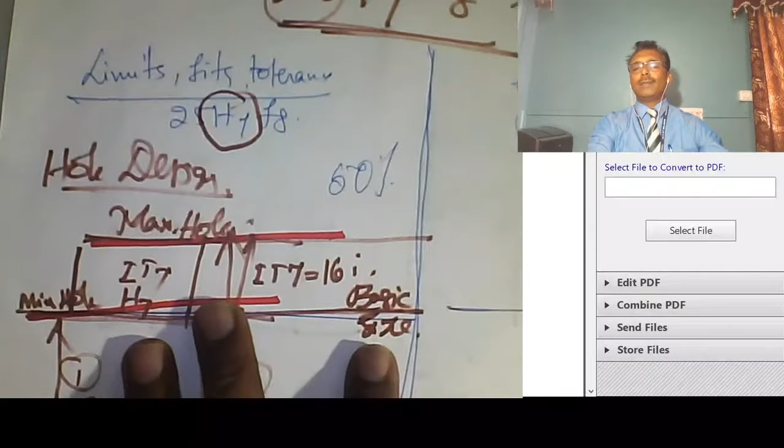Okay, just a minute, I have one more camera, I just showcase that. Can you see this? Yeah, look at this. So effortlessly they are moving from one slide, then see, on the background they have a PPT. I doubt, I was always doubting how these people are doing all these lectures.

There are two ways of live streaming the lectures, please know this, there are two ways. One is direct live streaming on YouTube, wherein the flexibility is very limited, okay, you can see my video or the presenter's video on full screen. It is quite useful for theoretical subjects where it is only one-way delivery.

You don't need a PowerPoint presentation, it is only the discussion, but at any given point of time, if you want to write something, you will get stuck in that.

Otherwise, you will have to go in the layman's way, write something on a sheet and hold it before a camera. It looks thoroughly unprofessional. So I was wondering how these online classes are being conducted. What is the way to do this?

For the next 7-8 days I worked on that, and this is now the final situation. I think you can see now, while giving lectures, I can start working on this. I will discuss all these things whenever I want. I can come back to the drawing sheet, then if I want, I can go back to my PDF file.

Yeah, can you see this? Then I can showcase, can you see? Yeah, now look at this. So all this is possible.

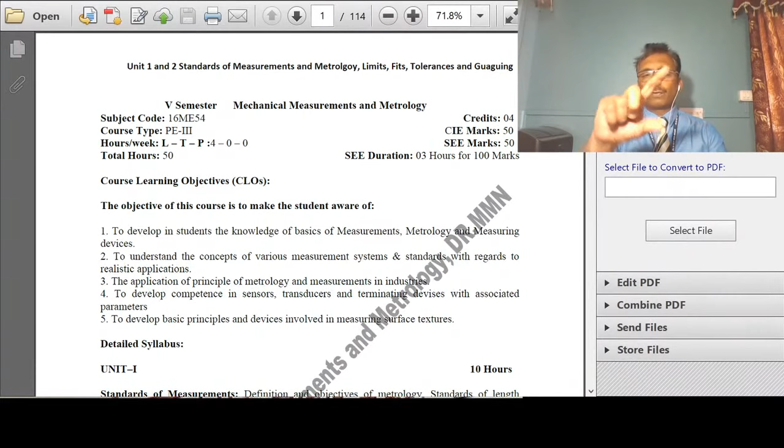Looks good, all set. I can see 15 students. Arey wow, that looks good. Who are the newcomers here? Epic, boring, no not you. Wait 2 minutes, we'll call our friends. Oh that looks great, great. Epic.

I will wait for your feedback. I will wait for some more time. Wait for another 5 minutes. Not a problem, as long as I can reach out to many students, I will be more than happy.

Gaurav, Omkar Gaurav, good morning. Then who are the other students? Please introduce. 18, arey wah, number is going up. 4 likes, good.

Meanwhile, for the next 5 minutes, I will tell you my arrangements, what I have set up, a studio here in my home itself. Can you see? I will showcase you this. I don't want to disturb the camera setup, but nevertheless, I will show you through my laptop.

There is, I have made, one is a table lamp right in front. Then I have 2 screens, but the second screen I am keeping it idle. Like in my room, I use double screens, right? So I have one more screen here, I am not using it. Then I can show you this. Can you see this setup here, please? Can you see this? Yeah.

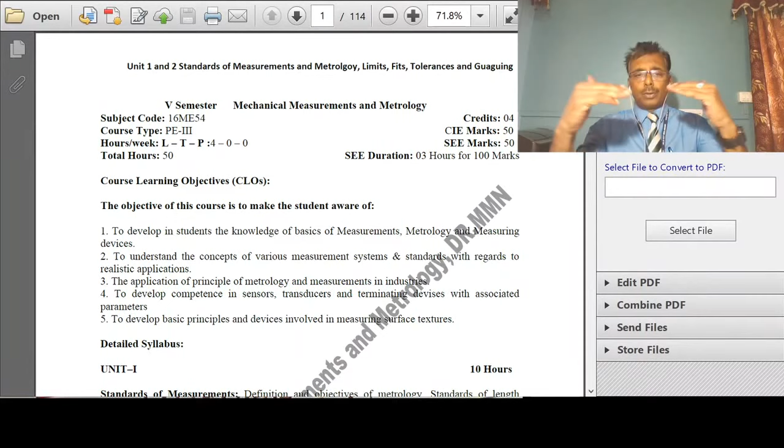Like you can showcase what you want - it is so flexible. You can go to YouTube, you can run YouTube. You want to go to Firefox, you can project that Firefox onto your screen. That can be shown straight away without any lag or disturbance, as if you are in front of your computer.

No, I want to write something and give the lectures - that can be done. Just a minute, look at this. Yeah, I want to write something now, I want to showcase as if I'm in a classroom. That can be done, can you see this?

Then, no, I want to go back to my PDF file. Good, so I can refer to the PDF file. Then I want to change - the same sheet is being seen, right? Let me change, can you see this?

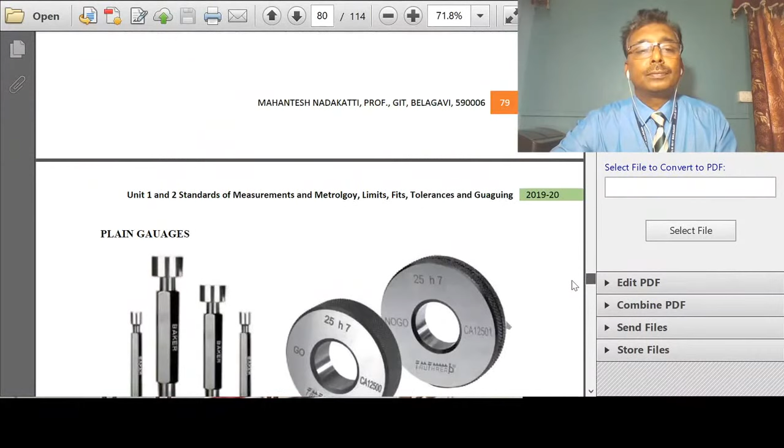Okay, we are discussing the problem on gauges. Let me go to the gauge section here, can you see this? All this flexibility is available. Now look at this, plain gauges - we are going to discuss about gauges now.

Okay, let me just check how many are online so that I'll start my regular class. The time is now 10:12, and 16 students have joined us.

That looks interesting, then who is this? JM, good morning. Aniket Rao, good morning. Kiran Hiremat, oh I see, so you are the epic footballer, is it? Great to know about it. Next, I don't know who is this creepy freak - has not introduced the epic creepy name please. Who is this name, epic footballer? I don't know, did I miss out? 16 students, 6 likes, thank you.

Okay, so that's about my arrangements and my way of doing things. Hope we will have a good session. Can we start now? If someone can ping me 'start sir', I'll go ahead, or you want me to wait for some more minutes?

Who is this? Wait for, yeah, who is this? Somebody told wait sir, we'll call - yeah, footballer epic. Chetan Kumar Hubballi, good morning. Yesterday also you were present, great to know, so you are back. Back to live streaming. Then epic footballer, wait 2 minutes, we'll call our friends. Epic, who are you? I don't know the name. Anyway, did you call your friends or pass on your WhatsApp groups? Ask them to join me, I'll be more than happy.

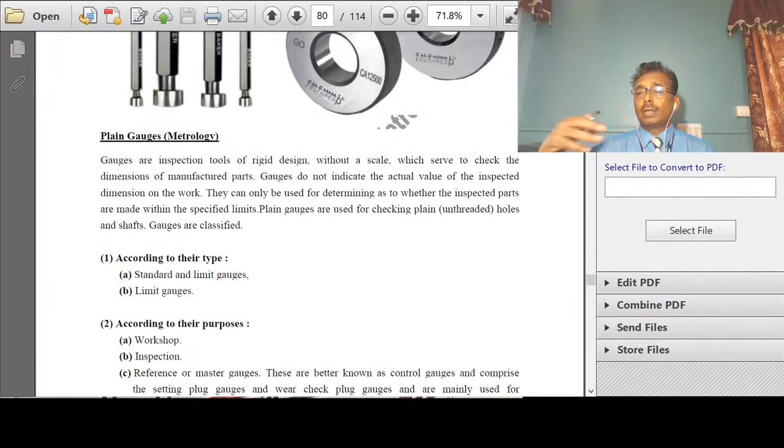So maybe tomorrow is a Sunday, Monday I'll take up the last unit. Maybe I can also discuss unit number 3 - I'll just revise what I have covered in class. I will revise all topics connected with unit 3 on basic mechanical measurement systems, standardized measurement systems, and some definitions associated with measurements. Then I can discuss intermediate modifying devices - primary, secondary, intermediate modifying devices, and the final readout devices. Then I can go ahead with pressure gauges and the various ways of that. Anyway, I will discuss that part during my next session.

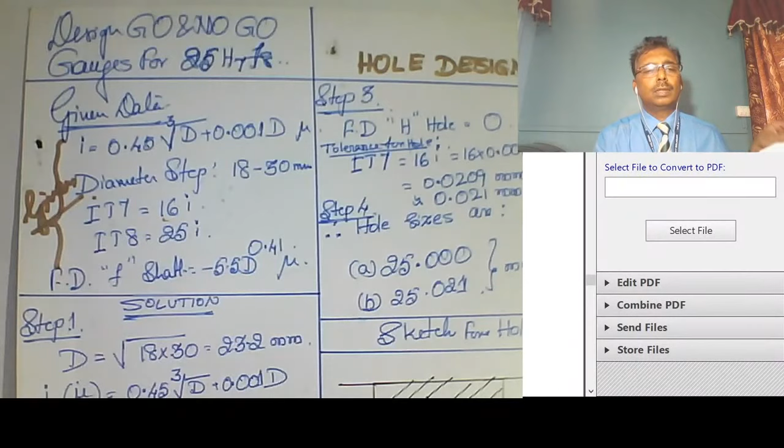Design of go and no-go gauge for 25H7F8. That's my today's topic. Yesterday also I started with the same, right?

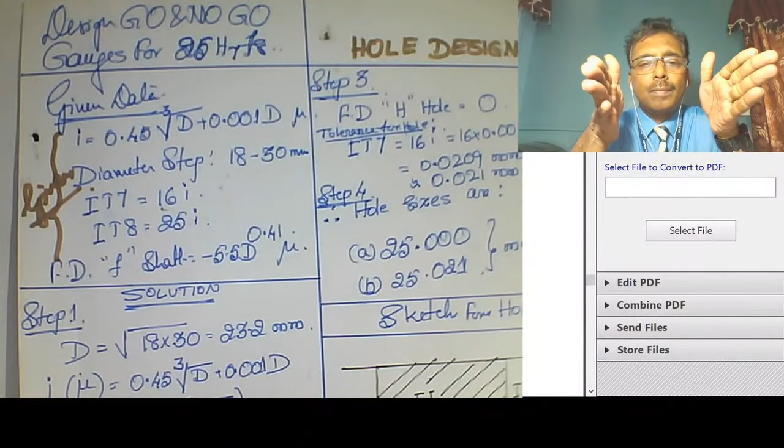Continuing with gauge design problem. 25H7F8, let us break this problem into two parts: one is limits, fits and tolerances problem, and another is gauge design problem. Now with examination point of view, what are the things that are needed?

Read the problem carefully. Problem may say - I think I have uploaded some numericals with you, you can go through the question papers and previous question papers. Go on my Google homepage, you will see previous question papers. I'll tell you how the question paper, or the pattern of question paper, looks.

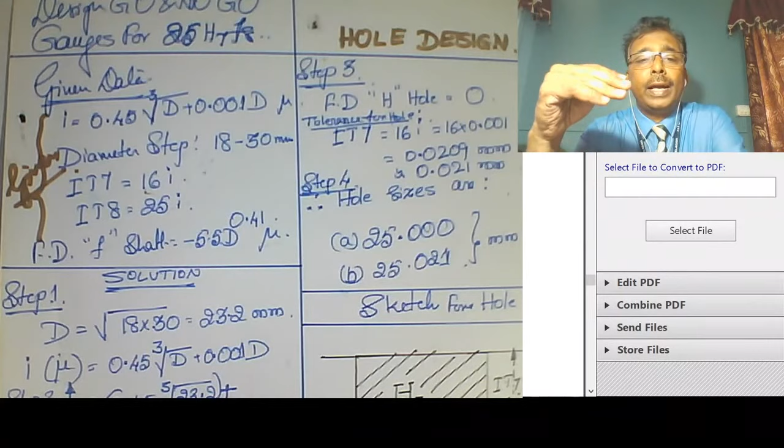Design limits and fit. Design a hole and a shaft. The tolerances for hole and shaft for say 25, 30, 35, 32, 33, that is the size, basic size. H, A, B, C, D, E, F, G, H, maybe H or maybe G hole, G5 or H7 - in this case is H7, and shaft, small letter shaft, F8, F4, A, B, C, D, E, F, G, H.

Okay, this is our XY line. Always I'll hold it this way, this is a scale. Right from A to H hole, they lie above the XY line.

This difference we call as fundamental deviation. Let me write it for you with a sketch pen so that it becomes easier. Can you see this please? Okay done, I will quickly review the nomenclature. This looks okay, done. Let me change the laptop position.

This looks horizontal. Okay, now this is how we have to exercise. This is hole A, say this is D, this is H hole, this is say K hole, this is P hole, then this is Z hole. Can you see this? Z hole.

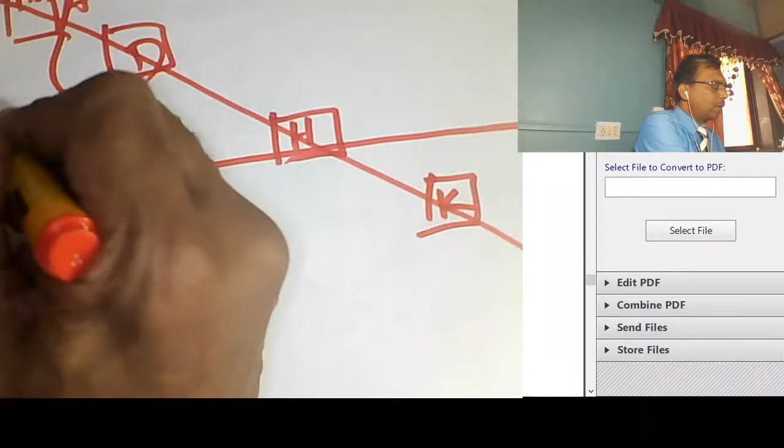This is called as fundamental deviation. And for A to H holes, fundamental deviation is positive. FD is positive.

Next, say something beyond H, J to Z - fundamental deviation, and don't refer to J, K, L, M, N - I can certainly say K to Z is negative deviation. This is fundamental deviation, FD. Okay, exactly opposite is shaft case.

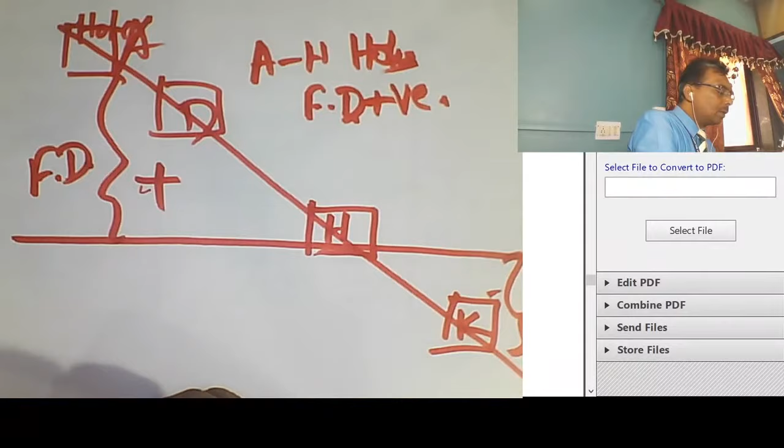I think now it's clear. Okay, shaft nomenclature. See, this is A shaft, this is D shaft, this is H shaft.

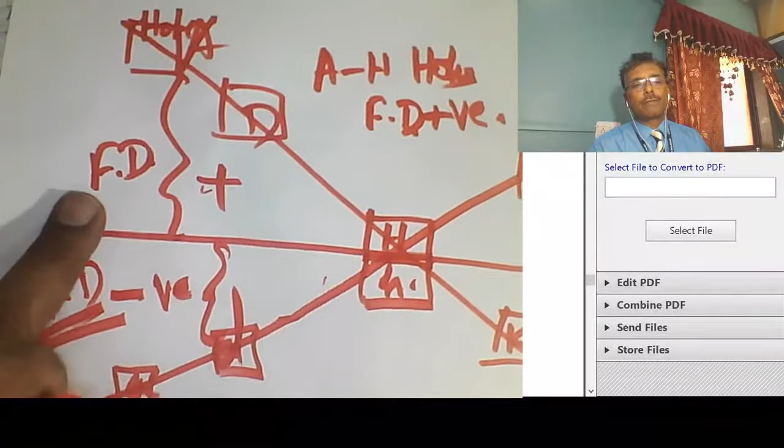H shaft. This is negative fundamental deviation, FD is negative. And similarly, K shaft, small p shaft, small zf shaft, and this fundamental deviation here is positive. Clear? This is positive, this is negative, A to H, A to H, small.

But I'll separately draw for H, just have a look. H hole and H shaft. Their fundamental deviation is 0. Can you see this? They lie exactly on a basic line. This is our basic size.

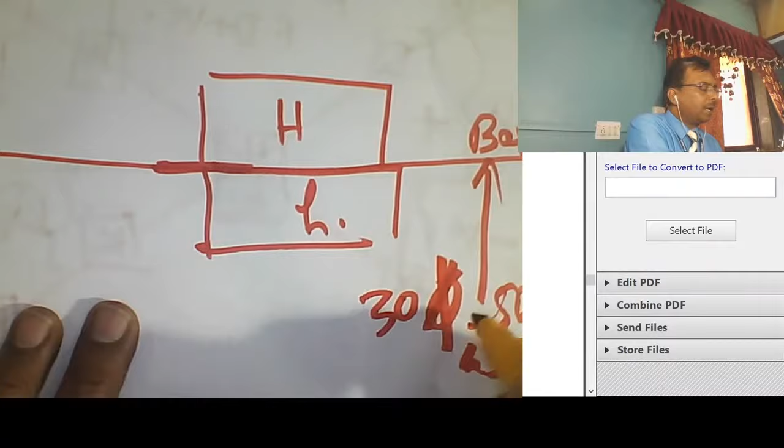Basic size could be 50 mm phi, 45, whatever. What is given? Say 30, in present case 25 diameter. This is in mm. The present example is 25 mm, which means that this size is 25 mm.

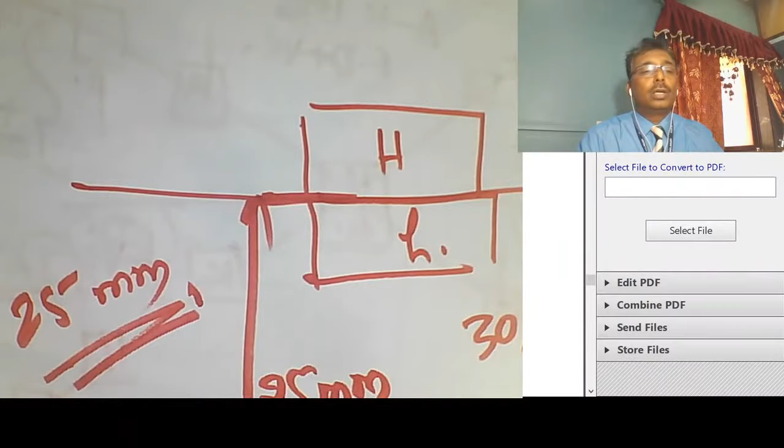I'll continue. So now coming back to the numerical, 25 mm. As I said, H hole, H shaft. For H hole and H shaft, the fundamental deviation, that is the distance between this basic line and the minimum tolerance. So we need to understand the minimum and the maximum tolerances.

If this is the hole, say this is 25 D hole, let's say D4, which means that this basic size is 25. This difference is fundamental deviation. It corresponds to hole D. You will have some equation, minus, it is plus, this side is, can you see this plus? It is above the XY line. So you will get, I'll show you the equations, fundamental deviation equations.

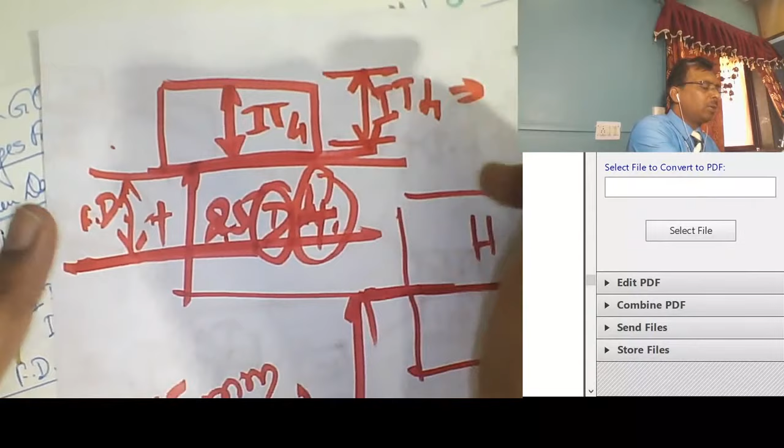Next, this corresponds to the IT grade. How much? In this case, it is 4. So IT4. How much is IT4? We have to find out. That will be given normally as 6i, 8i, 10i. I don't know how much is this, but I have to just check. That is given to you. You don't have to remember. Okay, this is the background of limits, fits, and tolerances.

So come back. Okay, 25 H7 F8. So the basic size is 25 mm. H hole with IT grade as 7, F shaft. The numerical in the examination will be given with this data.

i is equal to 0.45 cube root of D plus 0.001 D, and it is in microns. Mu is microns. Okay, next, it is better that you remember this, it's a fundamental equation that anybody can remember. Don't expect this, if in the examination it's not given, you may not say that sir, the data is insufficient or the equation is not given. Don't say that. i is equal to 0.45 cube root of, can you see this?

I is equal to 0.45 cube root of D plus 0.001 D, in microns, wherein the diameter D is given in terms of mm. This D is called the nominal diameter, which is nothing but the diametral step, the standard diametral step.

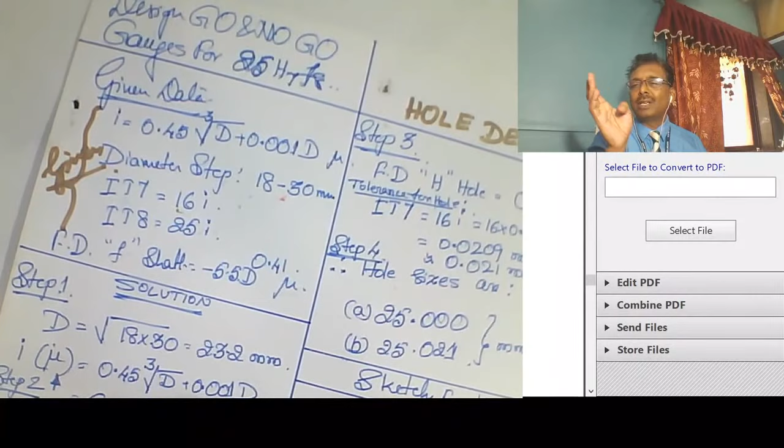These diametral steps are also given but not necessary; the examiner may or may not give them. You have to remember the basic diameter steps: 1 to 3, 3 to 6, 6 to 10, 10 to 18, 18 to 30, 30 to 50, 50 to 80, 80 to 120, 120 to 180, and so on. But if you remember up to 120 it's more than sufficient, since all or most applications are well within that range. So you are expected to know this.

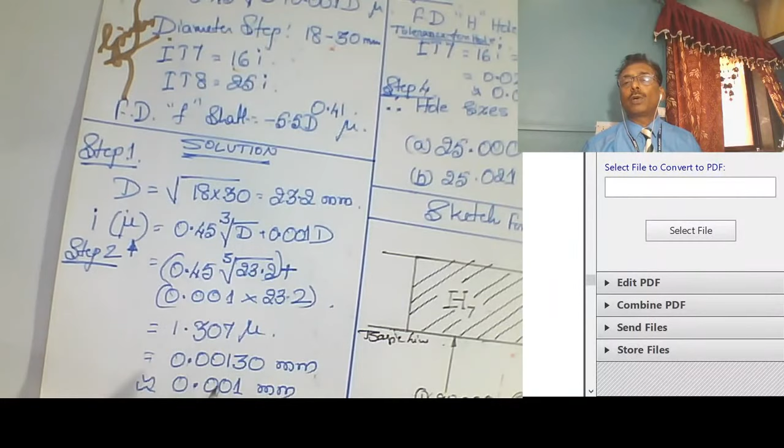Yesterday I solved the problem right up till hole design and shaft design. Quick review: D value is root of D1 into D2, substitute D in terms of mm, that is 18 into 30. Next, the I value: I is equal to 0.45 cube root of D plus 0.001 D, where D is substituted in millimeters. What you get here is in microns, 1.307 microns, that is nothing but 0.001 mm.

This was discussed yesterday. Now, step number 3, hole design. Simple, draw the sketch, H7, write it down. This is the basic size. We need to find out two values of the hole.

This is the one size, this is the second size. I have mentioned 1 and 2. First size is 25 mm, anyway it is given to you, and the fundamental deviation for the H hole is 0. IT7, yes, it is given as 16i by the examiner, so you don't have to remember it.

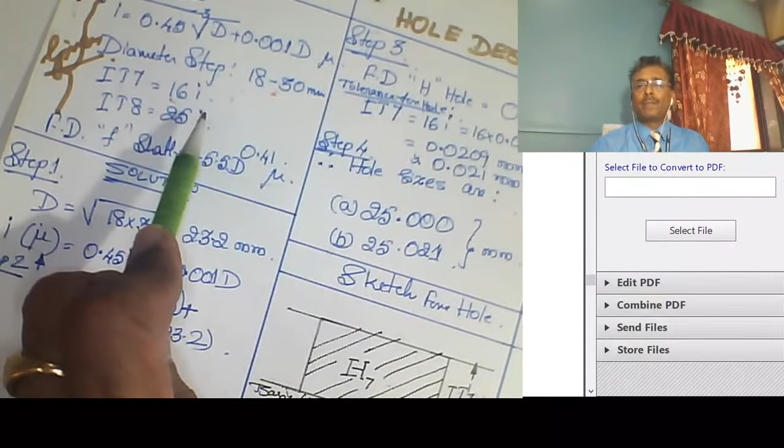IT7 is equal to 16i. 16i is nothing but what we found for I. IT7 is 16 into 0.001 mm, so you get 0.0209 mm.

Next, the two values of the hole: just mention 25. IT7 is equal to 16i, that is 0.021 mm, which means the second value is 25.021. So this is the minimum size of the hole, this is the maximum size of the hole, and both are positive values.

Next, shaft design. First, draw the shaft. F shaft lies below the XY line, right? I did discuss this earlier, you can easily remember this, keep it in mind.

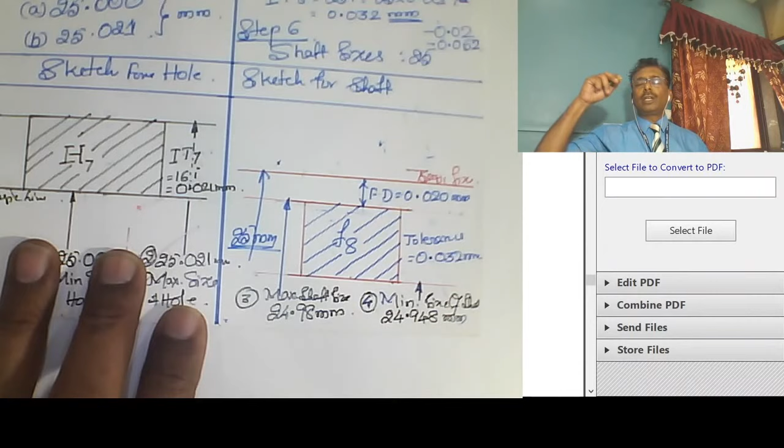Keep this in mind. Now it shows the F shaft. F shaft stands for fundamental deviation as minus, it is on the negative side. I have mentioned fundamental deviation as 0.020 mm. It is just below the basic size.

Now we need to find out the IT grade. IT grade for F8 is IT8. And what is the fundamental deviation? How much? For F shaft, FD is given as minus 5.5 d to the power 0.41, minus 5.5 into 23.2 raised to 0.41, and the answer you get here is in microns. Please note, you need to substitute diameter in millimeters, and the answer you get is in microns.

Got it? Okay, 0.020. This is where students tend to make a mistake. Either you bring it into millimeters, or you substitute in microns and mess up the units. Please don't do that. Substitute this in millimeters; this is in microns. Okay, tolerance for the shaft.

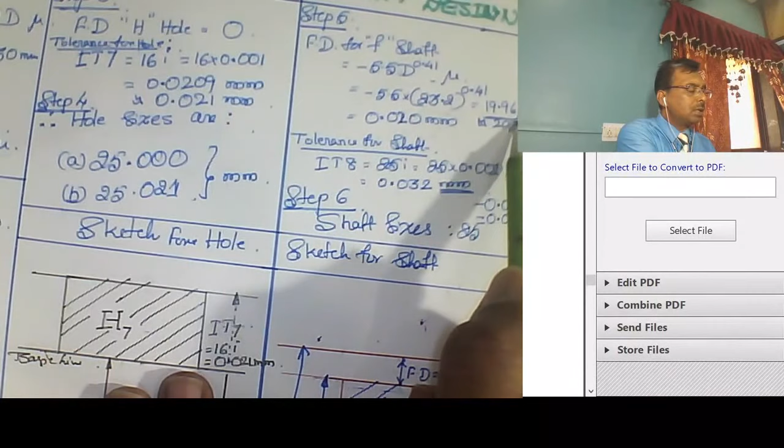Straight away, this is 25 minus fundamental deviation, that is value number 3, and this is 25 minus fundamental deviation minus IT8. IT8 I have mentioned, IT8 is equal to 25i, 25 into 0.001, that is 0.032 mm. Finally you get 0.052, this plus this is 0.05, 0.02, 0.03. So that means this is 24.948.

How did you get this? 25 minus this minus this. Okay, that completes the first half of the portion which I discussed yesterday.

Let us get going with gauge design today. I will discuss a very simple step of designing the gauge. Okay, please give me some time.

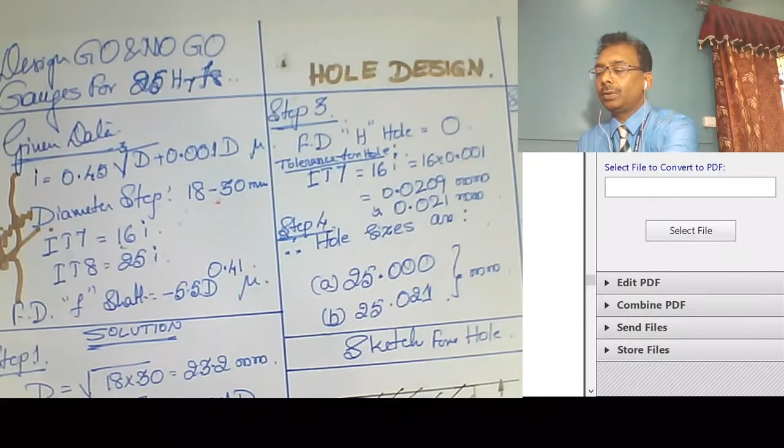No, I think I'll have to solve it again. Never mind. Just a minute. I will showcase this entire thing once more. Probably I will have to do the drawing sheet. Okay.

Let us get going with the solution of the gauge design.

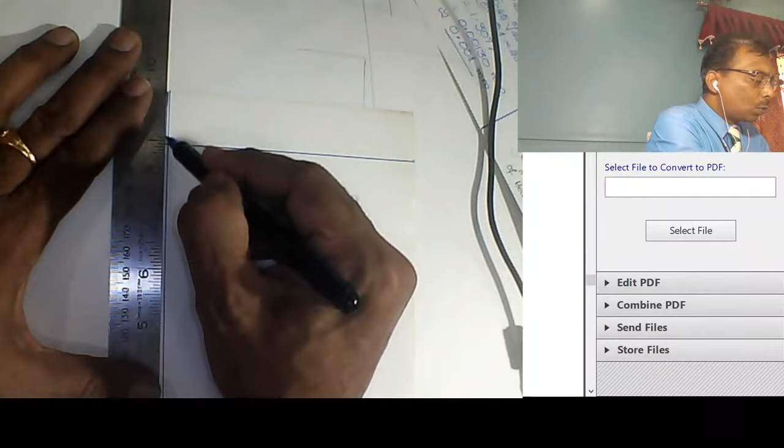Okay, good. Next, so we'll have two parts. One is gauge design for hole, another is gauge design for shaft.

Okay, so now gauge design for 25H7, that is hole. For hole we need a ring gauge, plug gauge. See, I want to check, if you want to check this hole, I have to fix a plug gauge, and one is a go plug gauge, another is no go plug gauge.

Okay, so there are two dimensions that I need to find. One more important concept here for designing the gauge is wear tolerance. By repeated use the gauges tend to enlarge because of wear and tear.

The gauges tend to enlarge in case of ring gauge, so we need to give the tolerance. Normally for gauge tolerance, it is taken as 10% of the hole tolerance or the shaft tolerance, that is 10% of this size. 10% of this is taken as tolerance on this side and tolerance on this side.

And for shaft, 10% of 0.032 mm. Can you hear? Did you understand? Gauge tolerance, you know, supposing if this is the gauge. Okay, let me, I think I have some mechanism here.

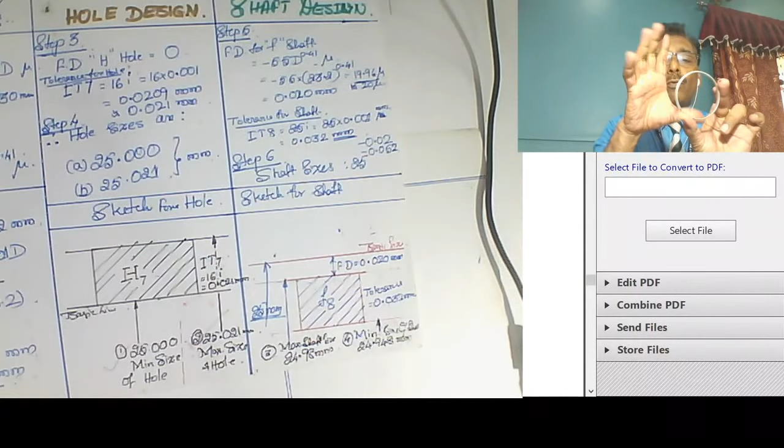Sure, yeah. Supposing this is the gauge. Because of repeated use of this gauge, it tends to wear out, so this wear allowance is given as 10%. Supposing this is being checked as a go gauge for a certain hole, this is a ring gauge. I want to just check a shaft, so whether it is passing through or not, right? So this is given as 10% of the tolerance for hole, and similarly for shaft it is 10% of the shaft tolerance.

Now with respect to this, 0.021 mm is tolerance on the hole side. So what should be the ring gauge tolerance? It should be 0.0021 mm. Okay, with that as background, let me just check my PDF file.

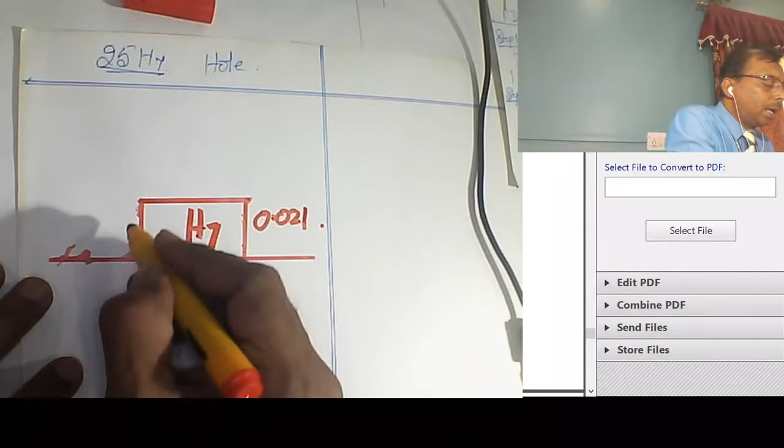H7 hole, we have already found out its value as 0.021 mm. Okay, and this is 25. This is 25.021. Obviously, 25.021. Okay, now we need to design the gauge for this.

Okay, two parts, one is go gauge, another is no go gauge. I will draw it with another pen for simplicity. I will mark it here. I will mark it on this side. Is it visible?

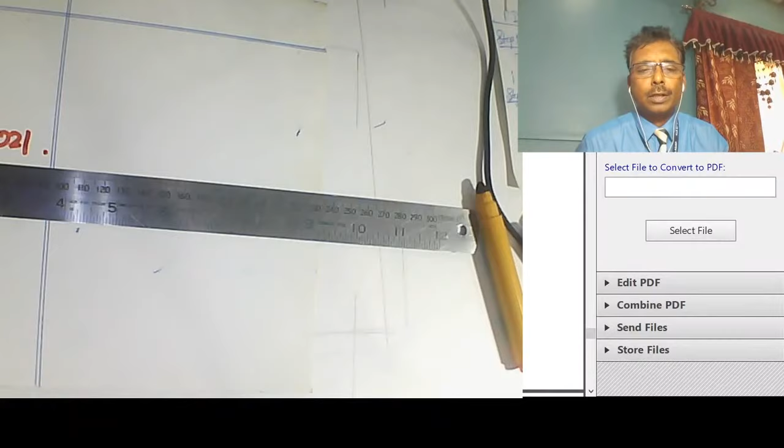Okay, next, same thing, I am continuing here. Okay, next, I am just drawing these limits of hole. This was our hole, this is the hole. Okay, now

All you need to do is, for go and no go gauge, just draw two rectangles here next to this. I just follow this step. Two rectangles. Okay, one, then another same size rectangle here. Same size rectangle. Can you see this? Okay, I'll show you once again. Don't worry. Both should be of the same size. Okay.

This size is... okay, I think this pen is not visible. This is 0.021, right? 0.021. How much should be this? This is 0.021. Obviously this is 0.0021, and same 0.0021 here, 0.021 mm. All the values please keep them in mm.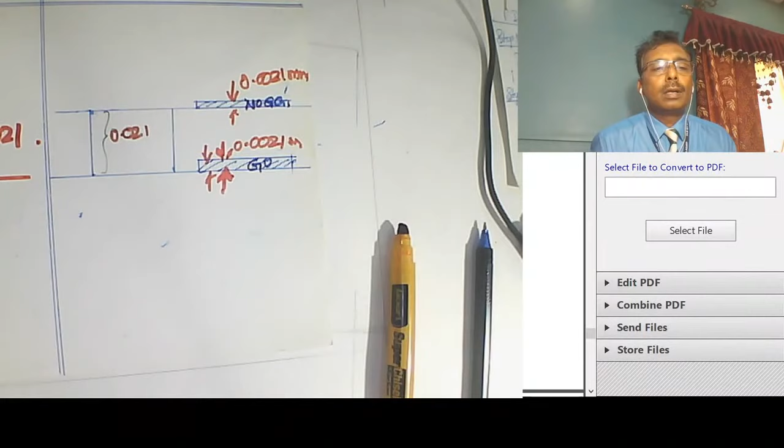So far clear? Okay, now all you need to do is write one as go gauge. This is go, this is no go. That's all. Got it? One is go, another is no go.

Step 5, next step, that is plug gauge design. Plug gauge design for hole. All you need to do is draw two parallel lines. One sec. Okay, sorry. Yeah. I'll write here, gauge tolerance

is equal to 10% of gauge. This gauge tolerance is 10% of hole tolerance value or shaft tolerance value, either ways is okay. Shaft tolerance value, in this case it is 0.021, so this is 0.0021.

Okay, next part, what we have to find out here? 4 values, 1, 2, 3, 4. I'll mark the 4 values here, you try to follow them mechanically. There is no mathematics, there is no computation, no integration, no differentiation. Straight away it is 4 values that you have to find out, of which 2 are already known to us. Okay, what are those 4 values?

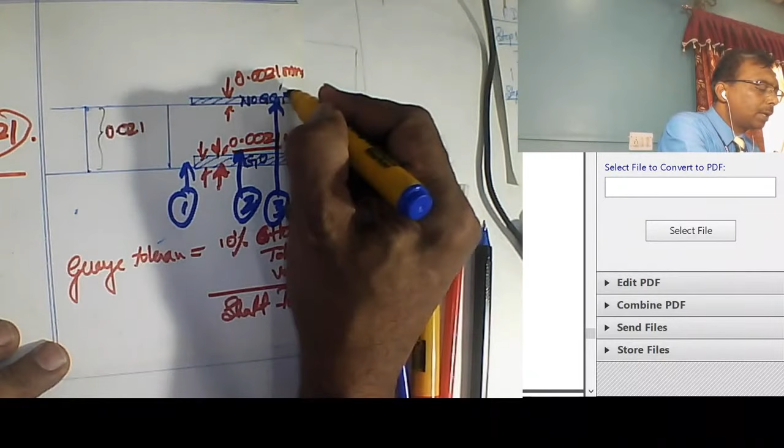1, 2, 3, and the last one is top portion 4. Got it? 2 values of go, lower limit of the go, higher limit of the go. 2 values of no go, lower limit of the no go, upper limit of the no go, out of which 2 are known to us. What are the 2 values known to us?

Look at this. 1 is known to us, 3 is known to us. Yes or no? 1 is known to us, 3 is known to us. What is that? 1 is nothing but lower value of the hole, 3 is nothing but upper value of the hole. So 2 are known. Another 2 we have to find out. How should we find out?

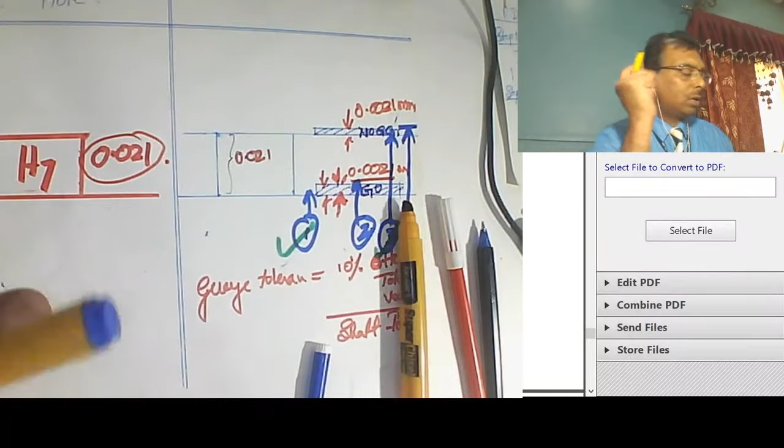Simple, look at this. This is 25. I have written here, okay. Go gauge. One value is 25.000. Second value is 25 plus 0.0021, right? 0.0021. Is it difficult? 0.0021 mm, that is nothing but 25.0021 mm. So this is go value, go limits. That's all, one part is over already.

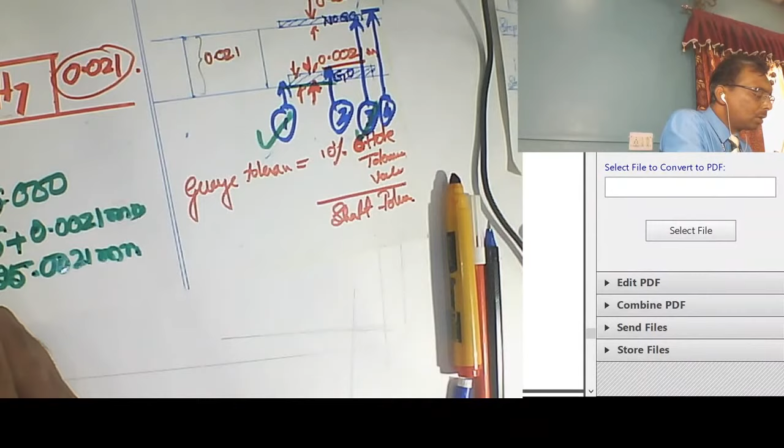Look, go limits. One size is 25, another is 25.0021. How did you get 25.0021? This one, 25.0021. How did you get 0.0021? That is nothing but 10% of 0.021. And this 0.021 is nothing but IT value, IT7, IT8, IT10, right up till IT16.

IT7 represents something like, you should be able to tell me now whether it is a smooth finish or rough finish, what kind of operation it must have been done with. Probably this is something done with either milling or lathe. If you go H8, somebody asking if it is H9, what kind of operation? It could be a drilling operation. And if it is mentioned H12, H14, H15, it should be some pressing, blanking.

H16 would represent casting, that will have 1000 IT, so that means high tolerance. That means this size will be bigger here. Of course, it is in micron level. Even if it is more or less, it will always vary in terms of micron level.

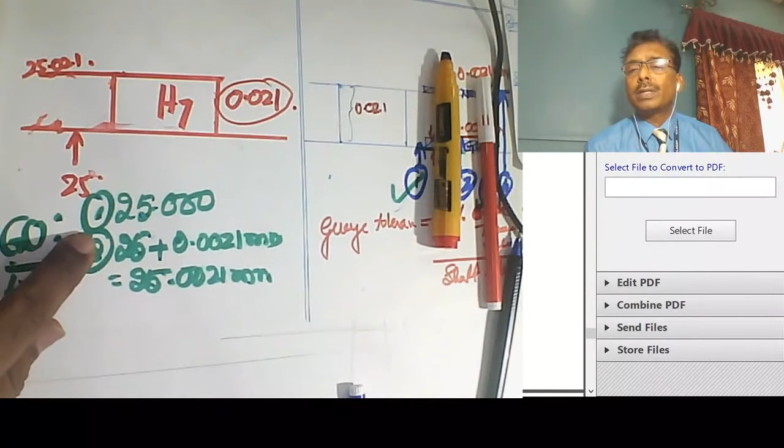Okay, coming back to 1, 2. Did you understand? 25.000, 25.0021. I think now the time is, how much is this? Time is 10:49. Okay, I have another 50... yeah, another 10-15 minutes. I should be able to wind up this part.

Okay, now I want to find out 3 and 4, out of which 3 is known to us, only 4th is to be found out. Okay, go gauge, no go gauge. Sorry, let me use the other color. Go gauge, no go gauge.

No go gauge, one value is this. This one, 3rd. Can you see this? 3rd, this size. So how much is that? 23.021. 23.021, yes or no? 23.021. Okay, what is the other value?

Simple. This is value number 3, value number 4. 4 is, sorry, not 23. How much is this? 25. 25.021. Next, 25.021 plus 0.0021. This part, 0.0021. Got it? I think you will get something like this value.

How much is that? Let me just check how much is the value I'm going to get. Can anybody tell me? Let me just check, please give me time. How much is the value here? Yeah, 25.00. 25.021 plus 0.0021, 25.023. This value is nothing but 25.023. That's all.

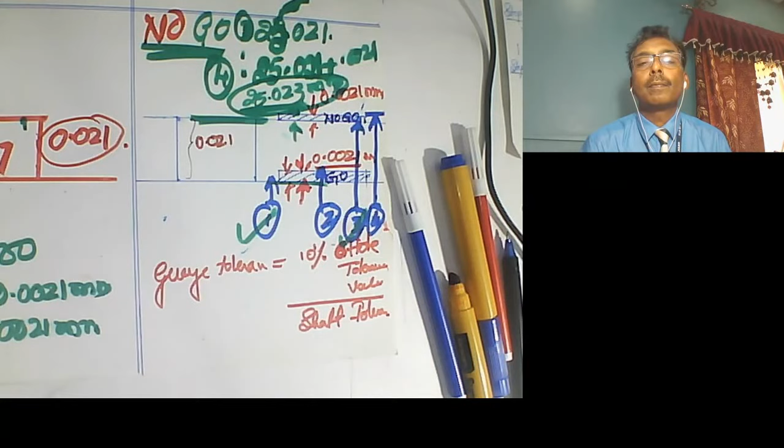One second, just hold on. Video capture, okay, it's happening. Please give me some time. I'm trying to work out something here. I think this is freezed. What happened here? Please hold on. Yeah, I got it. Sorry, there was some interruption here.

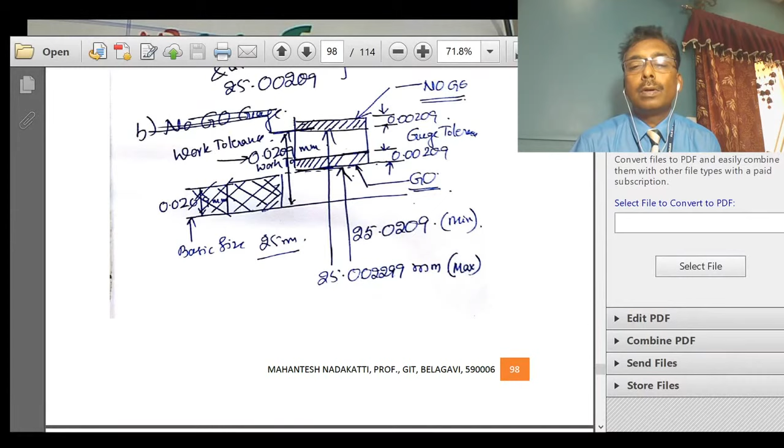Let us come back to this. One sec, just hold on. What happened to our drawing sheet? Okay.

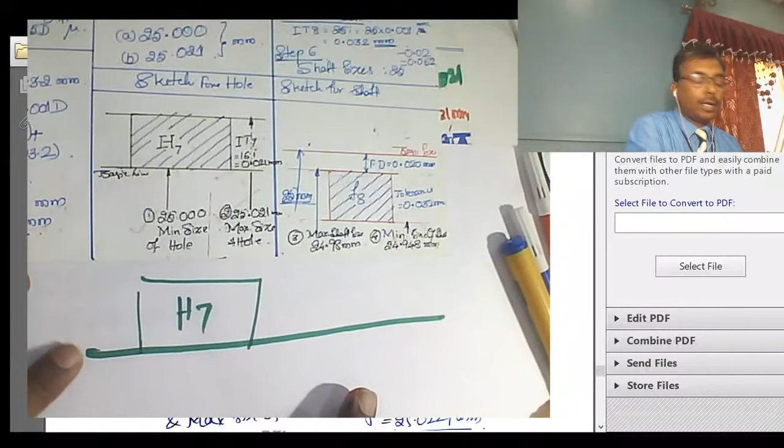Right, so I'll just quickly recap all the 4 values. This is the hole, H7. Just for your reference, I'll show this, H7. Draw another 2 lines, make these 2 parallel lines. Okay, I just made it larger size. Write this as go. This is go, this is no go. Okay, now this is 10%, this is 10%.

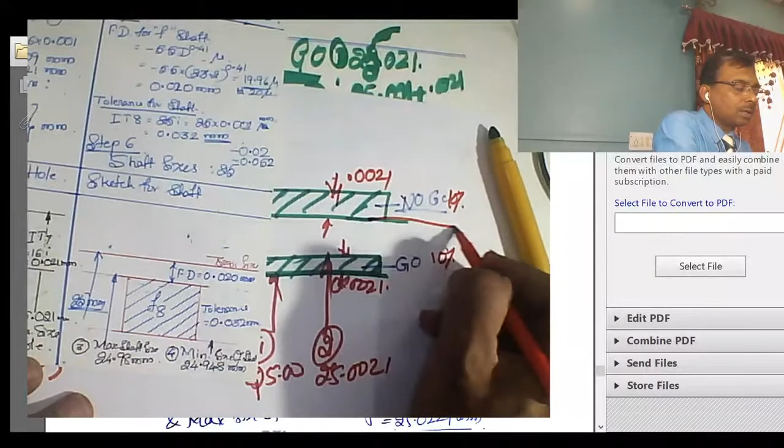10% of this value, and this value is 0.021 mm, so that means this is 0.0021 mm. This is also 0.0021 mm. So now this is 25 of course, 25. So the first one is 25.00, second one is 25.0021, third one is already known 25.021, 25.021, and this is the fourth value, 25 point, how much is that, 25.023, that's all in mm, 25.023. Please calculate this at home. After that you should be able to get the answers, not a problem.

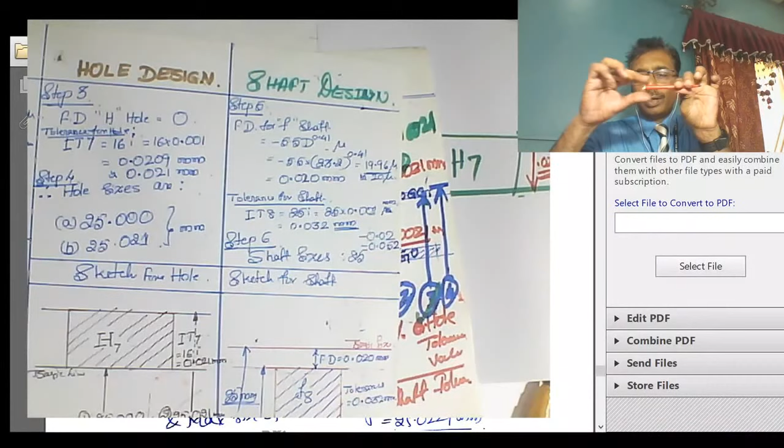Now if this is over, half the portion is over. Next comes, for the shaft we need to design ring gauge. If this is the hole, we need to design a plug gauge, right? For shaft, ring gauge, let me say this is the ring. This is the ring, one is go ring gauge, another is no go ring gauge. Procedure remains the same, direction will change.

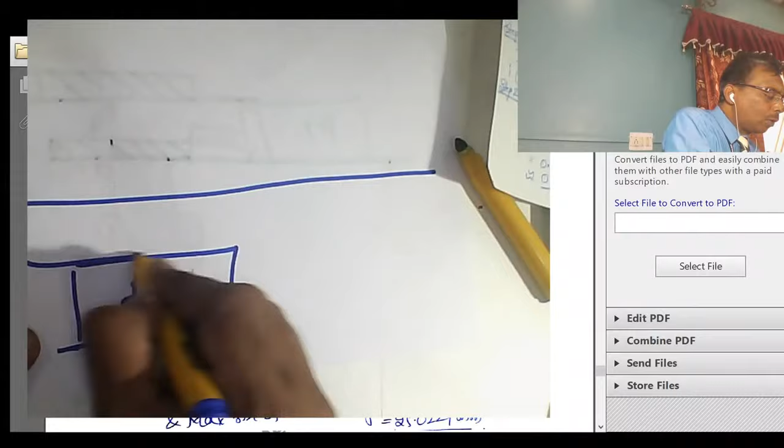This is F8, what is that? F8. Already we have found out these sizes. These sizes are found out to be how much. Can you see here? I'll just only write these sizes. This is 24.98, this size, can you see? Okay, 24.98, it's already found out. And this is also found out, right? This size, 24.948. 24.948. This value is less, this value is more, because this is towards minus side, this is the lower deviation of the shaft.

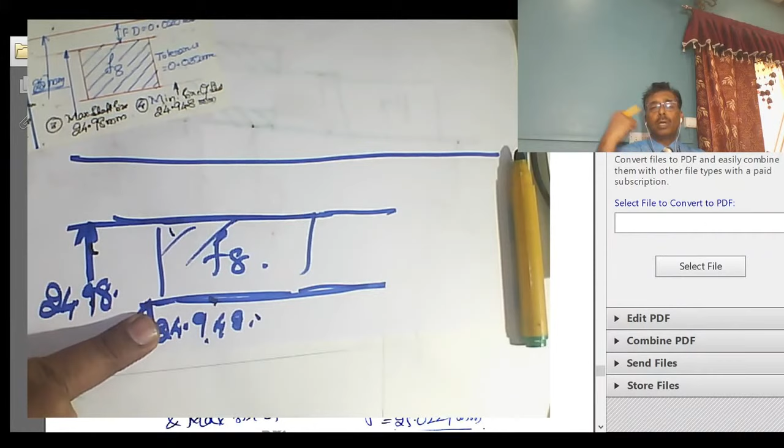This is lower deviation of the shaft, this is upper deviation of the shaft. This is maximum metal condition, this is minimum metal condition. If a shaft is given something smaller than this, say 24.8, 24.9, then the shaft gets rejected. If you are given a shaft which is more than 24.98, you can still work on that, you can get the price reduced, or you can send it back to the manufacturer, he can rework that and sell it to you, come back. But if the value given is less than 24.948, straight away it goes for rejection. Entire work is lost, or the material is lost, wastage.

Next, we need to design the ring gauge. Simple, step number 5 and 6, 4 values. I'll show you here, follow that mechanically, straightaway mechanical. Okay, I'll show you with another drawing, another pen. All you need to do is just draw 2 lines below this. Okay, earlier we were drawing it for hole, it was above this, right? Here, can you see, for hole it was above the line, here also above the basic line, but for shaft it is below the line. That's the only difference. But the distance will remain the same.

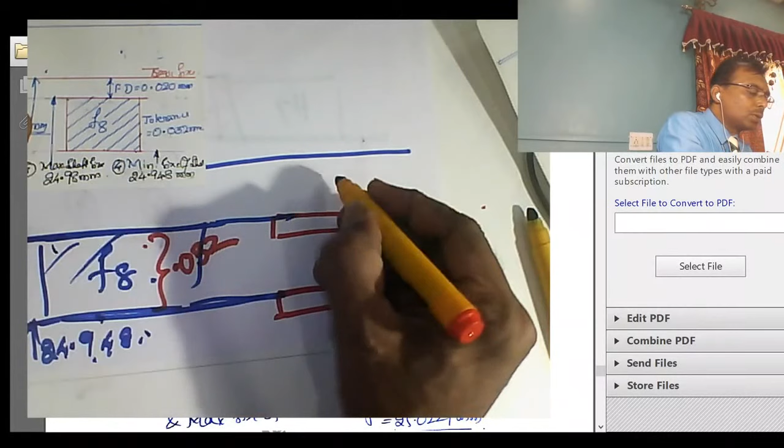How much was this? This was for shaft, can you see? 0.032, can you see it? Okay, so this is 0.032, so that means this will be 0.0032 mm, always don't forget, it is in mm. 10% of this value, 10%. This is called as gauge tolerance, gauge tolerance, okay, this is gauge tolerance. Exactly same gauge tolerance you have to give on this side. Okay.

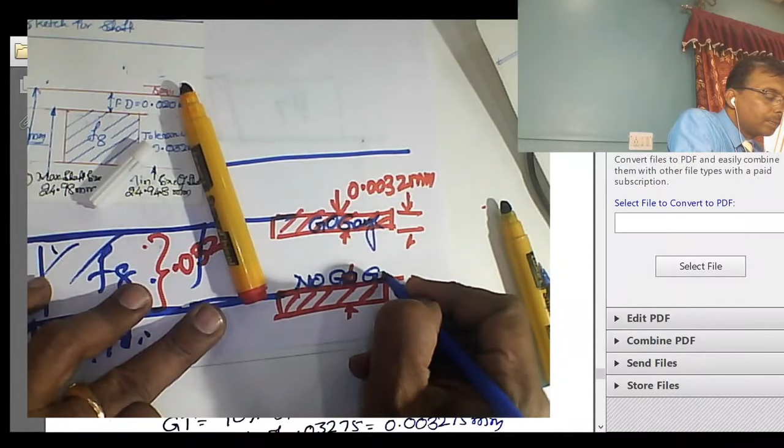Now, in this case, the change here is the top part becomes go gauge, the bottom part becomes no go gauge. This is go gauge for shaft. This is no go gauge for shaft. Is that clear? This is go, this is no go.

Difference between hole and shaft: for shaft this is a ring gauge, for hole it's a plug gauge. In case of hole, the tolerance was taken above basic size, above this size. This is no go, this is go. In this case, just below the XY line, this is go gauge, this is no go gauge.

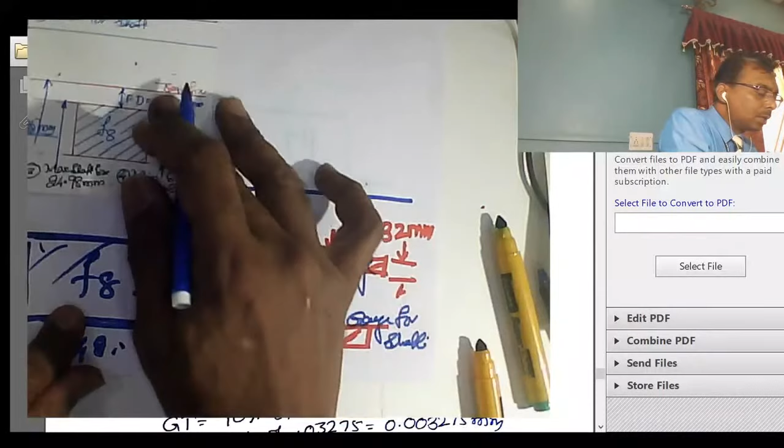Okay, now what are the values that we need to find out? Another 4 values. Can you say this? 5, 6, 7 and 8. If you find out 8 values, 2 values for go gauge, 2 values for no go gauge.

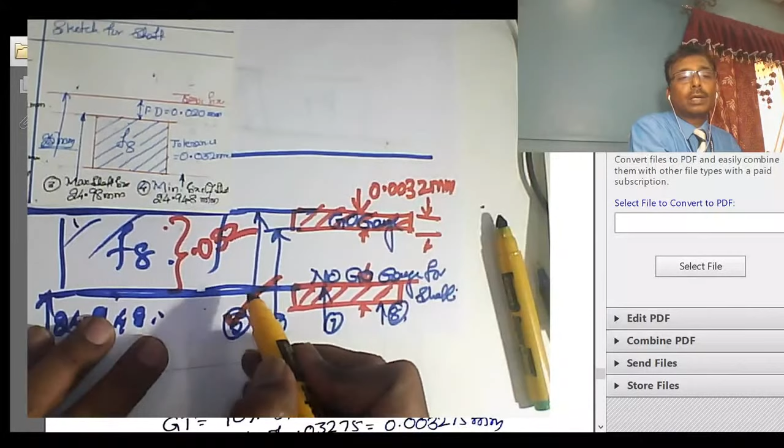Problem gets 100% over. Now, out of these 4, already 2 are known to us. What are the known values? Have a look. 5 is known already, this we have already found out. Next, 7 is also known, that is 24.948. So 5 is known, 7 is known.

You have to find out only 6 and 8. Value number 6, this is go gauge, go gauge for shaft. Go gauge for shaft, 5 and 6.

5 is 24.98. 6 is 24.98 minus this value, minus 0.0032. That's all. How much is that? 24.98 minus 0.0032 is 24.9768, that is 24.977 mm. Next, no go gauge.

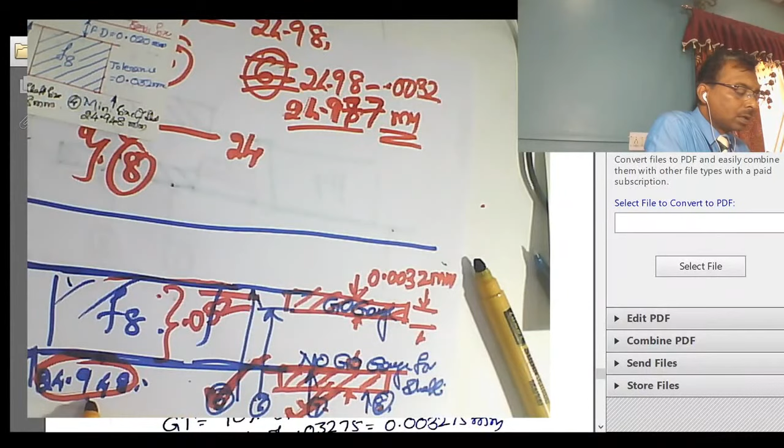No go gauge for shaft is nothing but 7 and 8. 7 is known already, 7 is 24.948 mm. Next, the 8th value is 24.948 minus this value.

Can you see this? So this value, this is go gauge, this is no go gauge. 24 point so and so minus this value, 0.0032. How much is that? 24.948 minus 0.0032 is 24.945 mm. That's all.

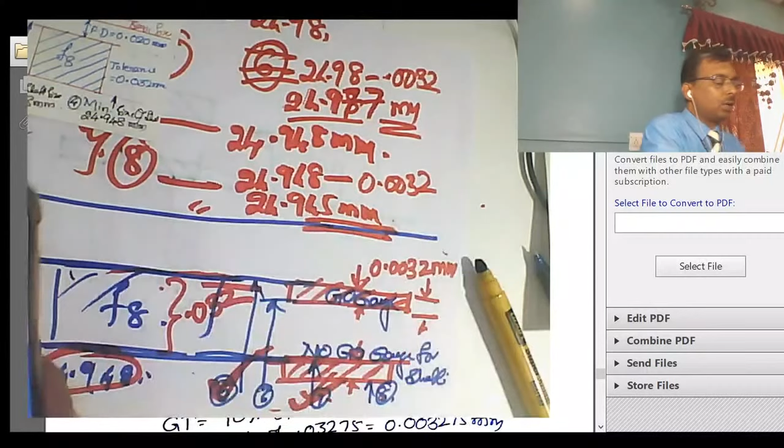Done. 8 values. 8 values of go and no go gauges for plug and shaft.

I will recollect everything right from the beginning.

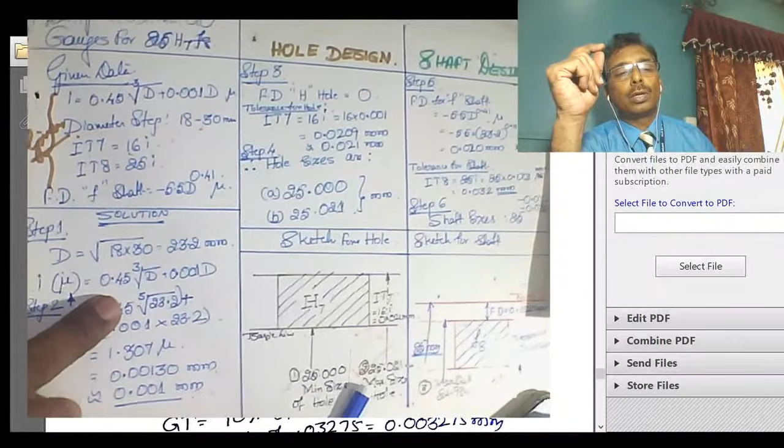One is first, the fundamental, this is a basic diameter, what is this? Find out the nominal diameter, then this is tolerance. Next, hole design: one is basic size, another is H7, IT7, find out this. So you get 2 values of hole, 1 and 2. Next, 2 values of shaft, 3 and 4.

Value number 3, value number 4. This is third, this is fourth. How did you get it? This is fundamental deviation, this is already given. This equation is given, fundamental deviation is given by the examiner.

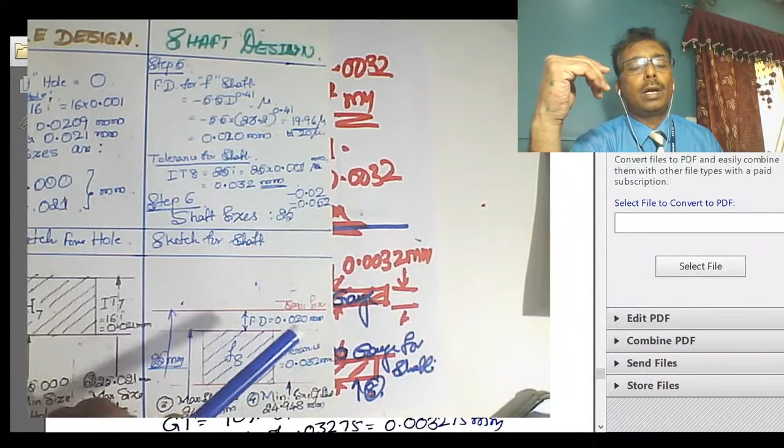So you can find out, and only thing is the answer you get here is in microns, convert that into millimeters. Please see that you write the values in the drawing, it becomes much simpler. Once you have written all these things, you don't need the numerical anymore. All you need is straight away the next hole design and the shaft design. Hole and shaft design could be done by using the drawing sheet.

Okay, quick way of drawing. Entire thing I will draw in one sheet, both for hole and the shaft. Follow me in this aspect carefully. In one single drawing, I will write down everything. I think it should be easier.

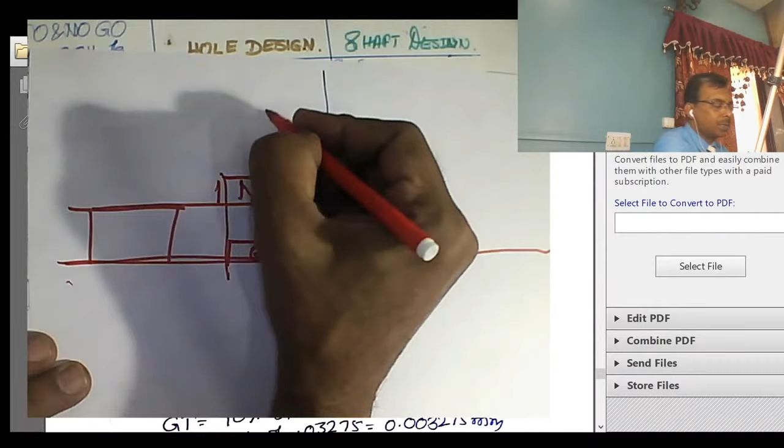Okay, hole, simple, extend the line, make 2 lines here, make 2 lines here. This is no go, this is go. That is, for holes you use plug gauges. These are for hole, use plug gauge.

Here we need to find out 2 values of go gauge, 2 values of no go gauge. I'll write down in another color: go value, no go value. So go value... I think this is not working.

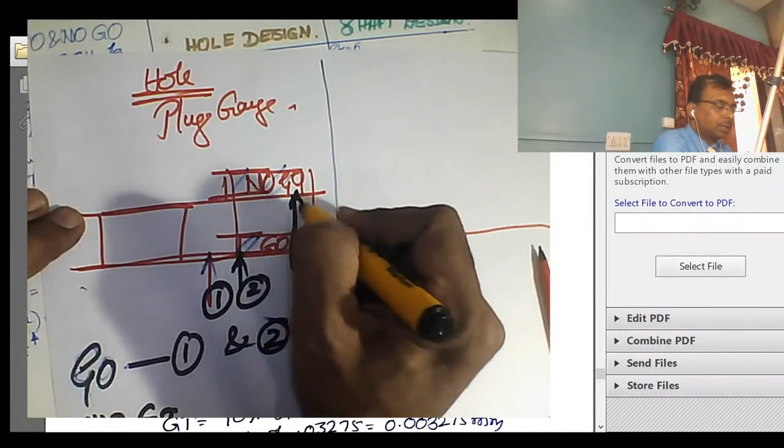Go value number 1 and number 2. This is 1. Next, no go plug gauge, no go plug gauge. Number 3, then number 4. So 1, 2, 3 and 4. Out of which, please note, we know 1, we know 3. This part is known, this part is known. So these two, 1 and 3, are known. We need to find out 2 and 4. Once you know this, you can find out this.

This is 10% size. We can find out all the remaining. So 1, 2, 3, 4 - two values of go, two values of no go. For hole is over. Now for shaft.

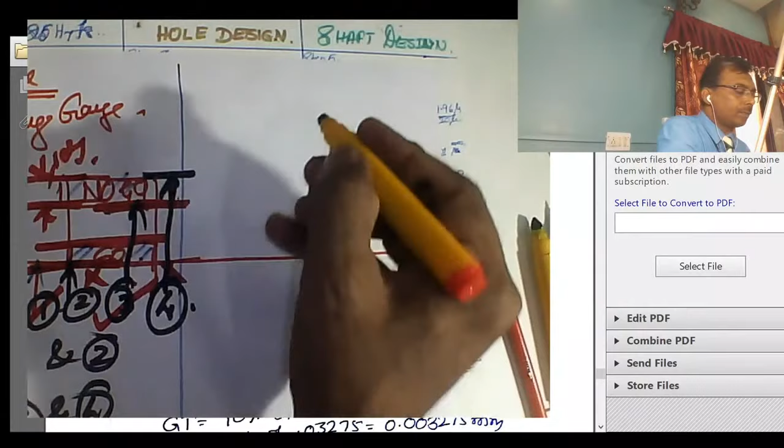F8. Done. All you need to do is extend this on the opposite side. Here it was above the line. Here we will be drawing it below the XY line. Okay.

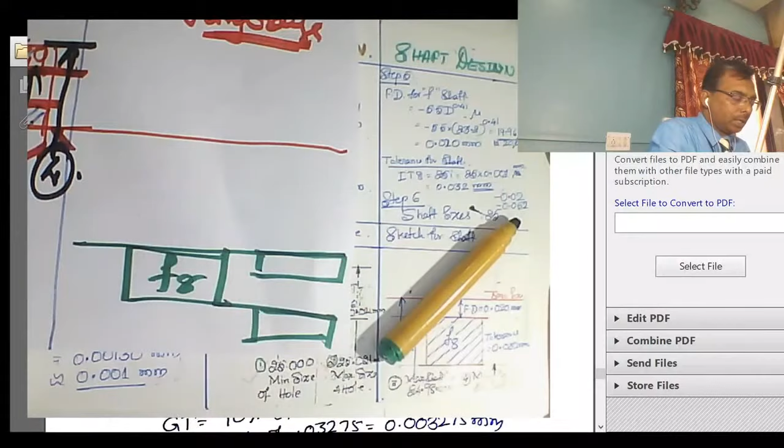For ring gauge, again go ring gauge, no go ring gauge. For go ring gauge, this is go. One sec. This is no go. This is go. This is no go. Okay.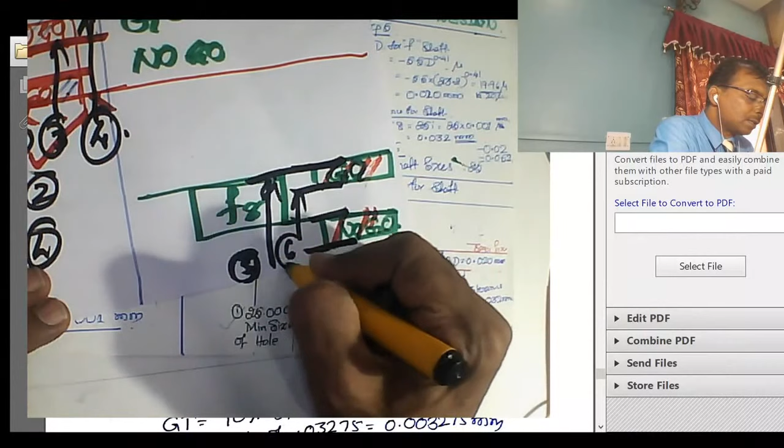How many values do you have to find out? 2 values here, 2 values here. So let me mark them. 4, 1, 2, 3, 4 are over. 5, 6, 7, and last one 8. Clear? 5, 6, 7 and 8. Two values of go, two values of no go.

This is go, this is no go. Okay.

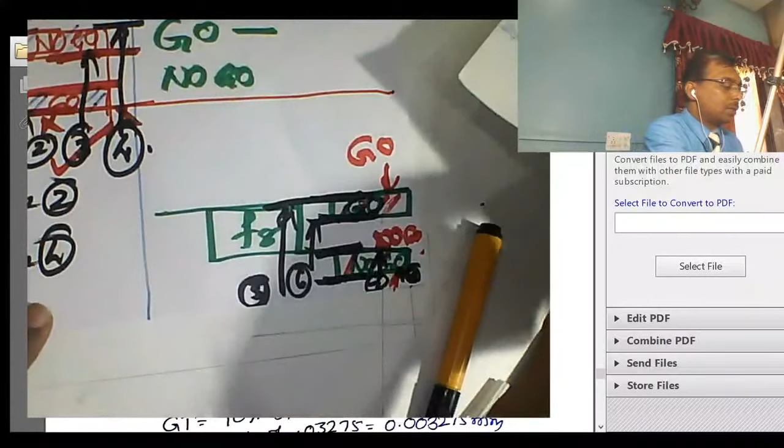I had drawn this actually in this way, but in this mess up I don't know where I lost that card. I wanted to showcase that card for you people. I lost it. Nevertheless, this is fine - please solve it by yourselves. It is also uploaded. Can you see here the values? I'll show you, wait.

Yeah, can you see this? Can you see these values? Basic size and then wear lines, okay, and then minus 00. All those values you can find out here, and you can start solving the problem. There is some, I think there is a mistake here. I will fix that later - if there is a mistake, I'll just rectify that. I think I am right. We'll follow this.

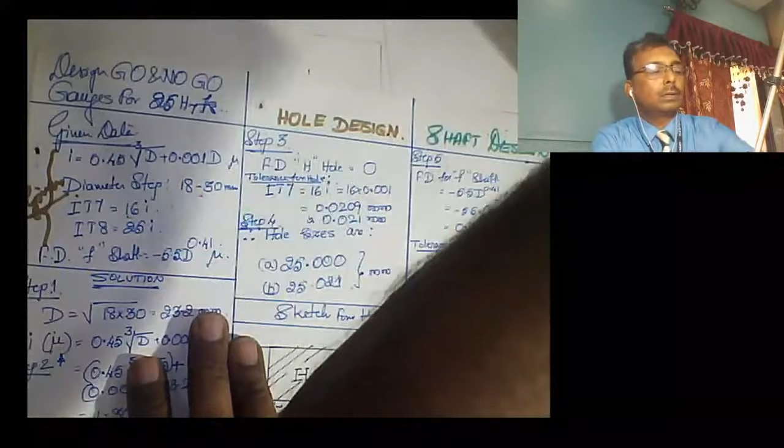Okay, so 8 values. Finally, come back to this main sheet. Design, go and no go gauge, 25H7f8. First half: design of hole and design of shaft. Second half: design of plug hole. For hole you need to have plug gauge, for shaft you need to have ring gauge. So design of plug gauge and design of ring gauge. And in the design of plug gauge you have go and no go gauge, and in the ring gauge again for the shaft you need to have a ring gauge, go ring gauge and no go ring gauge.

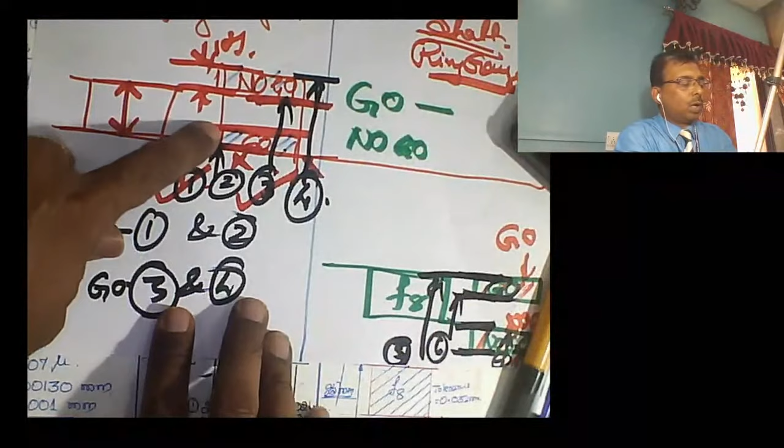Okay, so in this case there are no go and this is go. So 2 values of go, 2 values of no go. Next, 2 values of go, 2 values of no go for shaft.

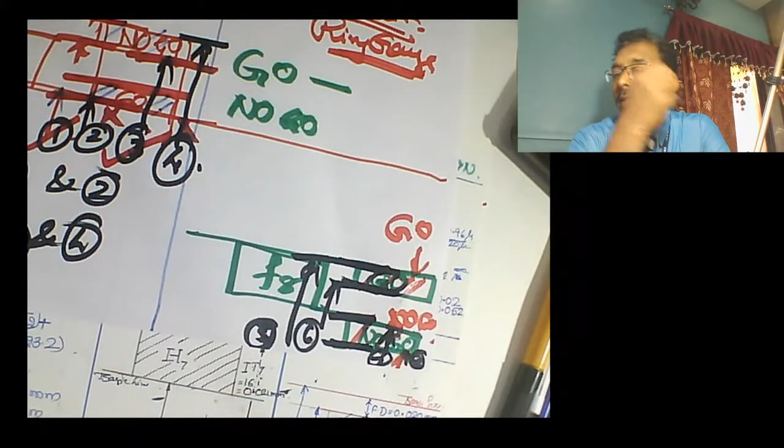Look at the two views. I have tried my level best to showcase this, and we can always discuss it. You can give me feedback about how to go ahead with this solution. But another important, equally important aspect is that I am able to get connected to you on a one-to-one basis. That makes me feel happy.

Please remember, we don't have books here. Without a book, I have tried whatever is in my mind, and uploaded it through my PDF file so that I am showcasing it. You can go through this PDF file.

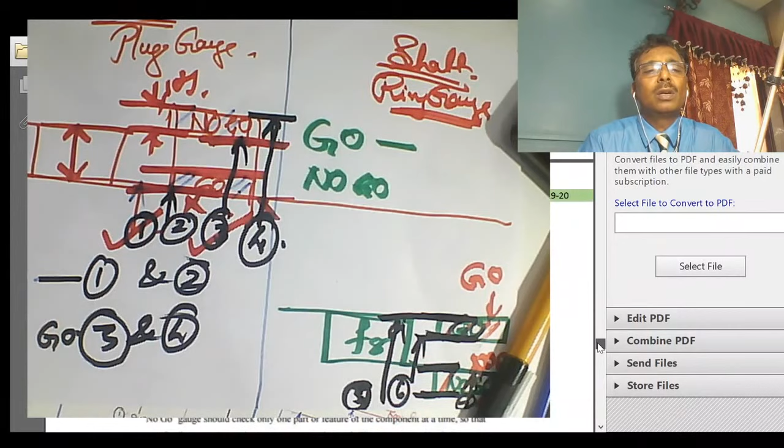Let me just showcase what is contained in this. Go through this PDF file. I have only covered the numerical part; the theory part you can always discuss, you can understand easily. Go through the Taylor's principle of go and no-go gauge design. It is a very important topic from your examination point of view.

In the examinations, you normally see the question paper saying sketch and explain Taylor's principle of go limit, Taylor's principle of no-go limit. In Taylor's principle, the go gauge full form should mention these two points. The designation is applied to the limit of two limits of the size, which corresponds to the maximum material limit condition, that is the upper limit of the shaft and the lower limit of the hole.

Taylor's, please try to understand. If you wish me to take up this Taylor's principle, you can just mention it in your chat box, I will take it up nevertheless. These are simple theory material.

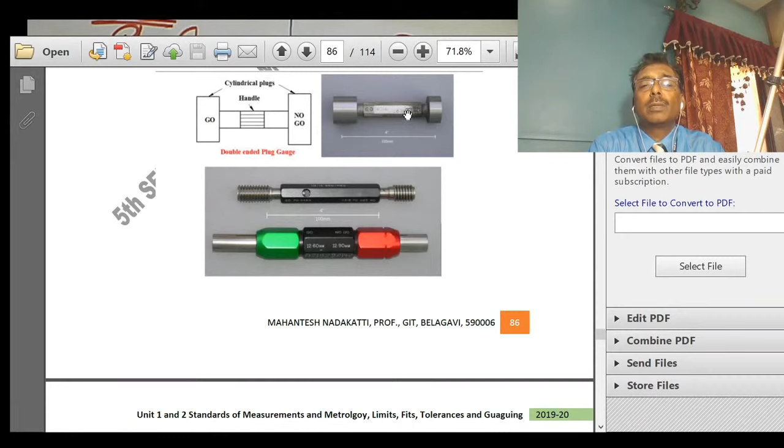Next, go and no-go gauge. Next, ring gauge. These ring gauges are used, and you have a separate ring gauge for go. In case of plug gauges, both go and no-go can be made in a single shaft, but in case of ring gauge, for both go and no-go you need separate gauges. One is the go ring gauge, another is the no-go ring gauge.